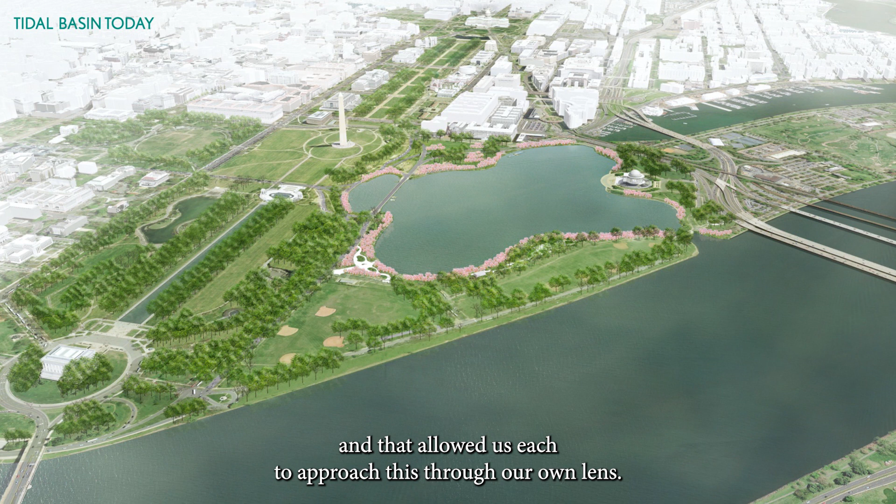What we recognized allowed us each to approach this through our own lens. We recognize that the reality is that this landscape is already experiencing the impacts of an evolving climate. Saltwater intrusion through the aging seawalls has already started to affect the cherry trees that are a critical part of our national identity and a symbol of our international relations. Given its proximity to the Potomac and the influence of the Chesapeake Bay, just like CL was talking about yesterday in Apalachicola, this site will be an early indicator of the impact of sea level rise and increased flooding frequency. By 2050, projections show that the tidal basin, the Jefferson Memorial, the FDR Memorial, and the Martin Luther King Memorial will all experience frequent flooding and severe impacts from sea level rise and saltwater intrusion.

We approach this through the lens of preservation. A lot of our work involves preservation, and when you first look at Section 106 of the National Historic Preservation Act, it sort of stumps you on how you address change at this scale. The federal requirements say that we have to seek ways to avoid, minimize, and mitigate any adverse effects. I think we all wish we knew how to do that.

So we took a different approach on this and accepted the fact that this will continue to change. We started with an understanding of the tidal basin as a landscape that is not singular, not fixed, nor should it be. It's as much about the people it represents, their actions and dreams, as the experiences it affords, both collectively and individually. And it reflects many moments in time and many memories throughout time. We posit that this landscape has actually never been complete, and that regardless of the impacts being felt by a changing climate, it ultimately must remain forever an open and flexible work in progress.

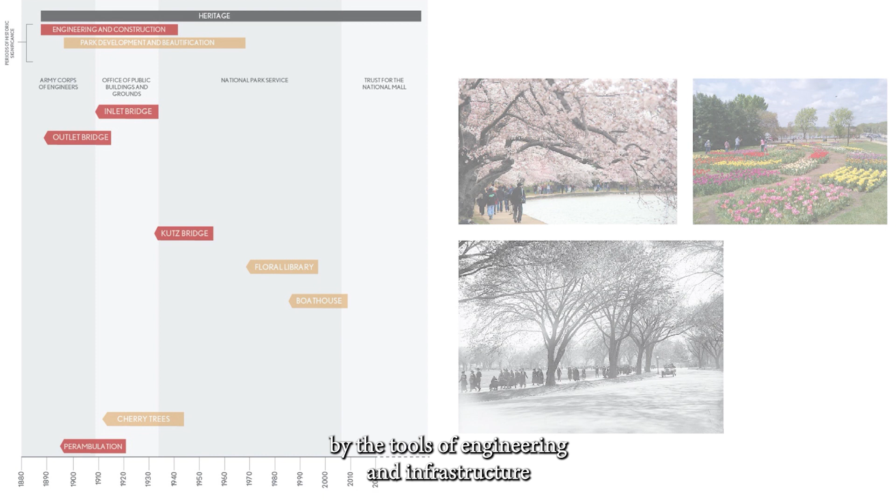The tidal basin has been shaped by the tools of engineering and infrastructure in the name of beautification and park building, and for collective commemoration and memorialization. Today, that heritage is at risk. We see preservation as a layered strategy that includes reinforcement where feasible and effective, which is not everywhere, and migration where not. Recognizing the need for this landscape to continue to adapt and evolve well beyond the scope of our knowledge today, balancing preservation with a vision for continued progress forward.

To facilitate this, we built the case that the tidal basin's landscape significance, unlike what's spelled out in the Secretary of the Interior's guidelines, which talk about things, elements, and features of a site, the tidal basin was not about those features. It was really, in many ways, about the qualities and experiences: your relationship to water, your relationship to the L'Enfant grid, your relationship to the cherry trees, and how you move through those spaces. The circulation network then becomes not a series of lines on the ground that are about paths, but a series of experiences held both individually by the single user and collectively as we all take those paths, either together or apart.

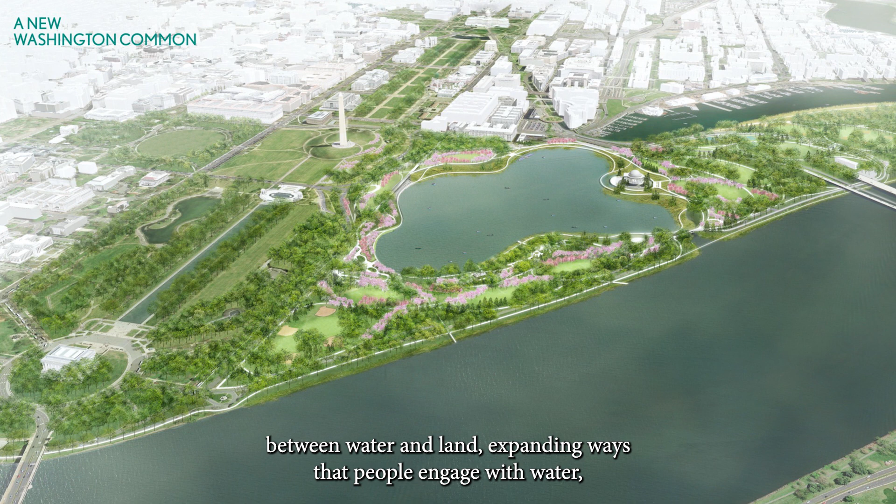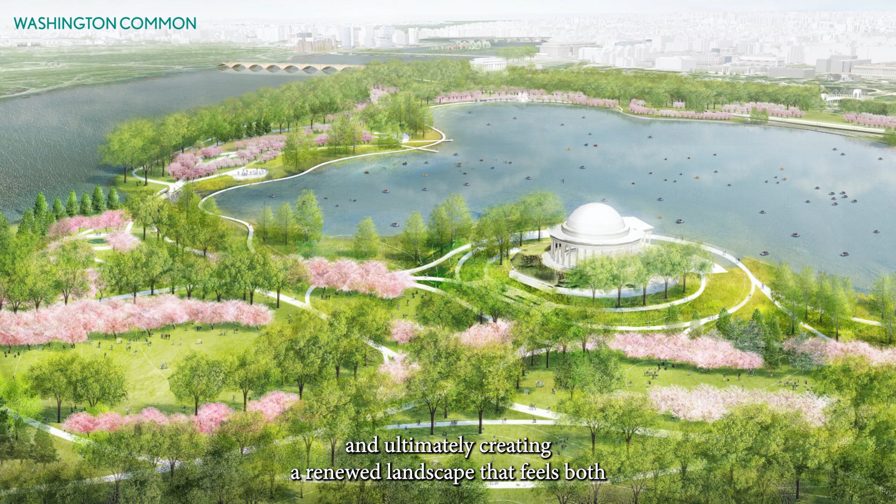So our question became: how do you maintain the qualities of this place while addressing the dynamic relationship between water and land, expanding ways that people engage with water, introducing prospects where these dynamics become visible, and ultimately creating a renewed landscape that feels both continuity with its past and asserts a new relationship with its future. Thank you.

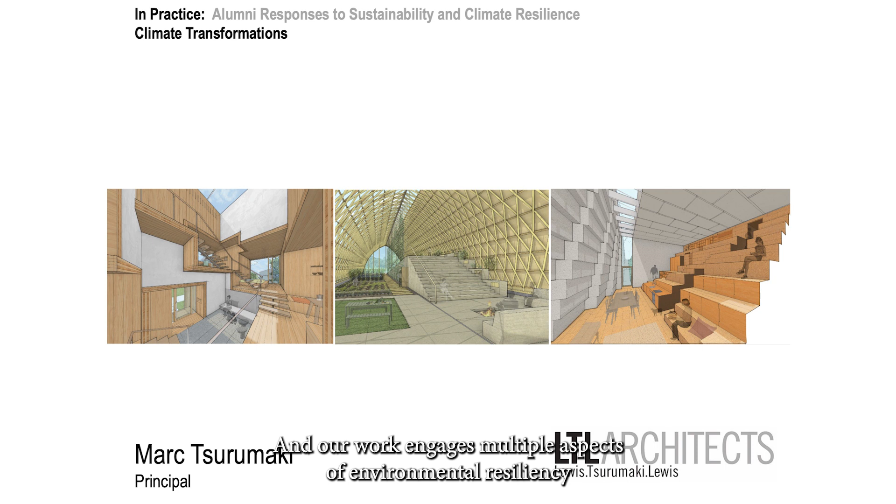Thanks so much, John. Amazing to see the work and really fantastic to be here and part of this panel and symposium today. My name is Marc Tsurumaki. I'm one of the principals of LTL Architects. We're located in New York City, and our work engages multiple aspects of environmental resiliency, from questions of sea level rise and its impacts on cities in a project for the Rising Currents program at the Museum of Modern Art back in 2010, to the restoration of Steeplechase Pier in Coney Island in the wake of Hurricane Sandy.

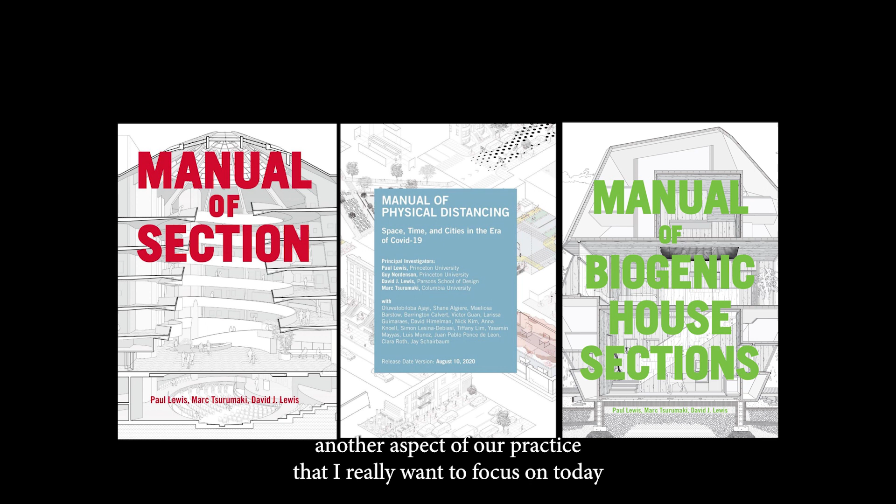But there's another aspect of our practice that I really want to focus on today that operates principally through research, publication, and representation, and this often takes the form of what we call manuals. Today I'm going to talk about the most recent of these publications, called the Manual of Biogenic House Sections,

which engages questions of how we build and specifically what we build with in a moment of environmental crisis. This involves a shift from thinking about operational carbon to thinking about embodied carbon. If we look at the next 30 years, we realize that half of the total carbon emissions of new construction around the planet will be embodied carbon, more if we think about the impacts of high-performance building. And the important part about that is that embodied carbon is upfront carbon.

Whereas operational carbon accrues over the lifespan of the building over decades, embodied carbon is already expended at the time that the building is built, which means that it's arguably the more relevant component to address if we're really looking at these urgent time spans that we need to avoid the most devastating impacts of climate change. So what can we do?

We can build less and reuse more, and reuse is an incredibly important part of this embodied carbon question, but it's very unlikely that we're going to reuse our way out of this problem. By 2060, the world's projected to add about 2.5 trillion square feet of new construction. That's essentially doubling the building stock of the planet in 3 decades, and much of that in the global south, where reuse has more limited possibilities.

So what are the alternatives? Well, one of the alternatives is to build as much as possible with biogenic and geogenic materials that are low carbon, or in the case of plants, actually sequester carbon within their very cell structure. The good news is that these materials are readily available. They're abundant, they're globally distributed, they usually require very minimal processing, they're inexpensive, and they're reintegratable into renewable cycles. And most importantly, they're available now.

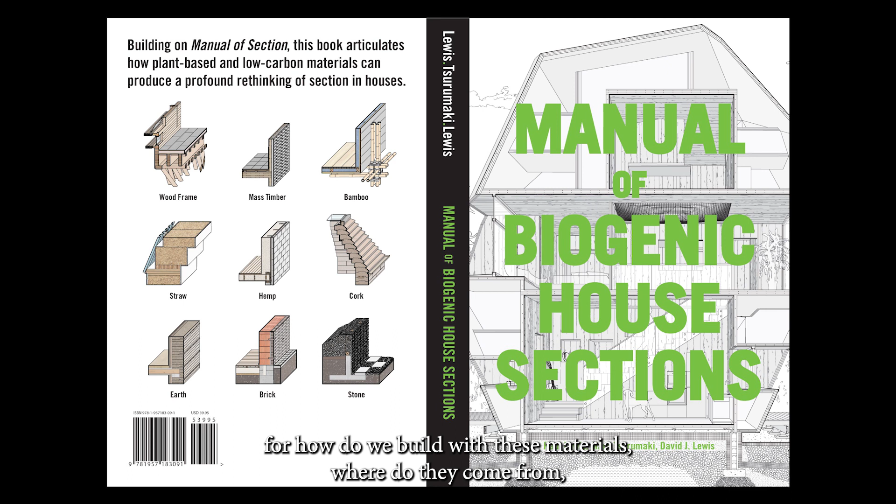So for the last 4 years, we've been working on this publication, which we hope acts as a guide and a manual for how do we build with these materials, where do they come from, how are they processed, and how have they taken the form of innovative buildings in the context of houses from around the world. So why houses? In part because we know houses are a big part of the problem.

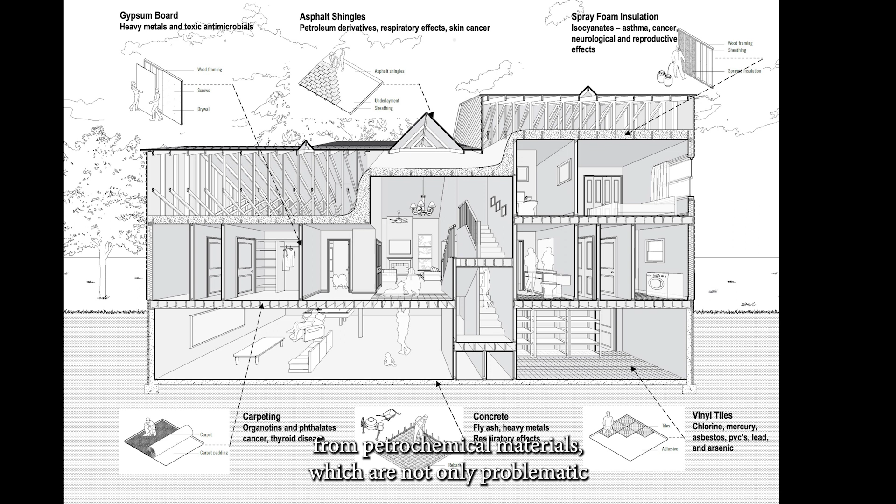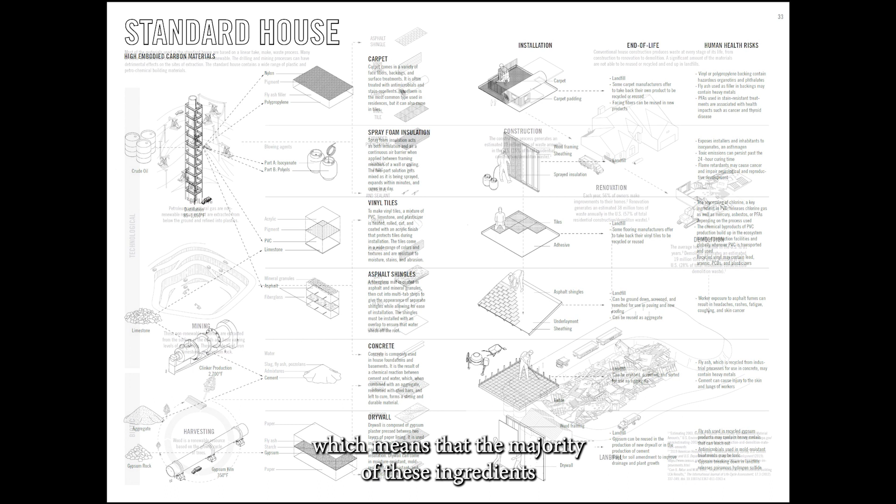We build too many of them, over 1 million single-family homes in North America alone every year. And so the very ubiquity of the house makes it a potent vehicle for transformations in our material economies. In North America, at least, our houses are too big, and with the exception of the wood frame, they're built almost entirely from petrochemical materials, which are not only problematic from a carbon standpoint, but also from a human health perspective. They're part of a take, make, trash linear cycle, which means that the majority of these ingredients or materials end up in the landfill at the end of the life cycle of the building.

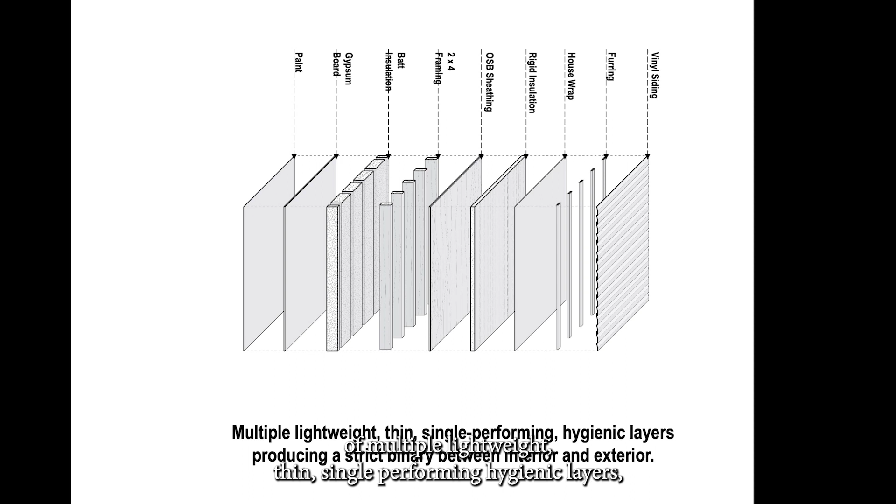If we zoom in on the wall of the house, we see one of the reasons for this, which is that the wall is comprised of multiple lightweight, thin, single-performing hygienic layers, which are based on a strict division between inside and outside. These layers are, again, largely synthetic. They're very difficult to pull apart and reprocess, and they're often working at cross purposes to one another.

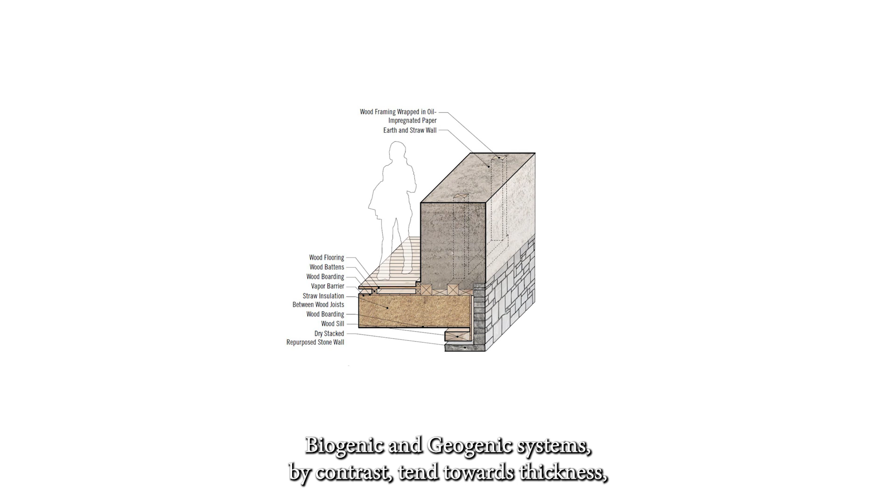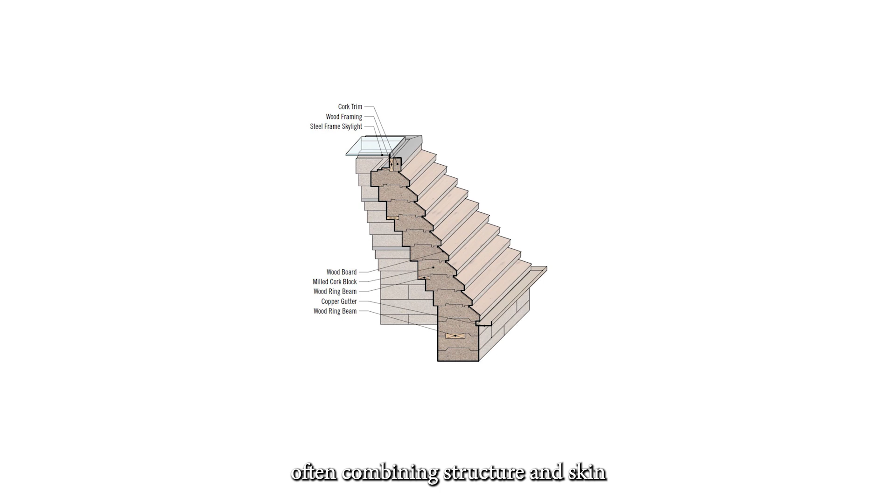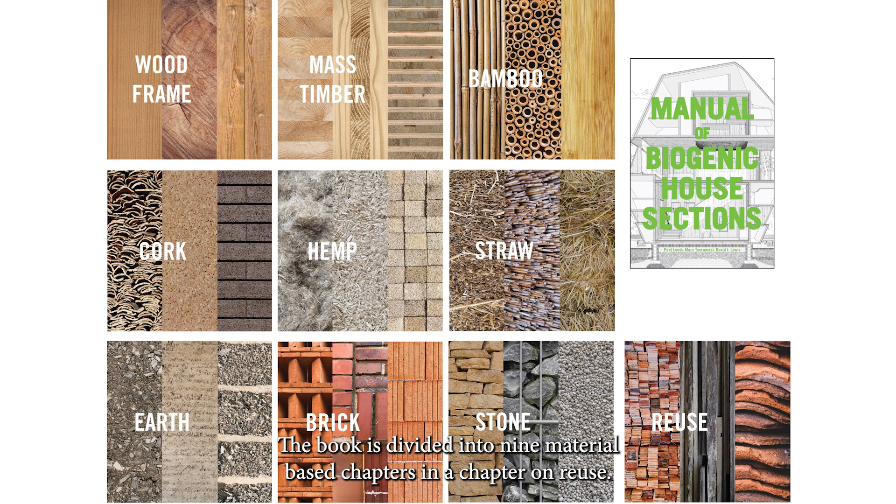Biogenic and geogenic systems, by contrast, tend towards thickness, often integrating multivalent performance within a single monolithic mass, often combining structure and skin, envelope and insulation within a single symbiotic assembly. We look in the book at 55 such assemblies culled from houses around the world. The book is divided into 9 material-based chapters, and a chapter on reuse.

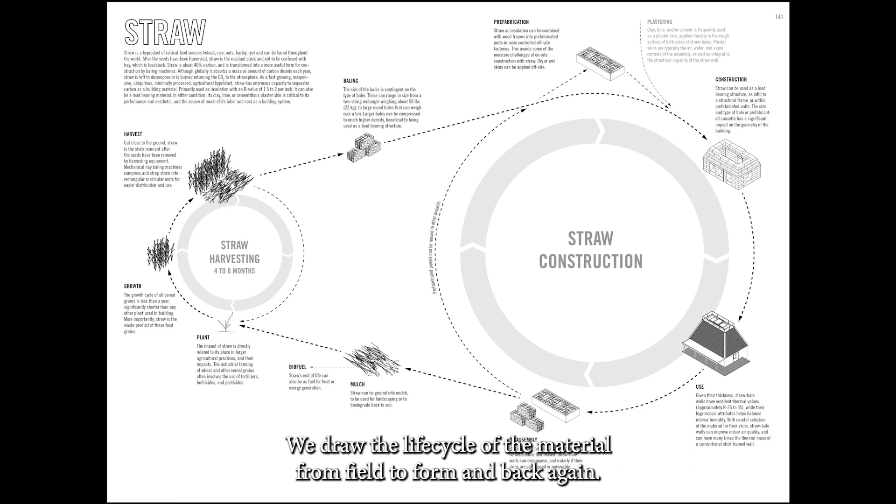In each instance, we look at the carbon sequestering potential of the material. We draw the life cycle of the material from field to form and back again, repositioning the building not as a static artifact, but as a temporary accumulation of matter that has an origin and an afterlife that's tied to recursive cycles that are bound to natural systems.

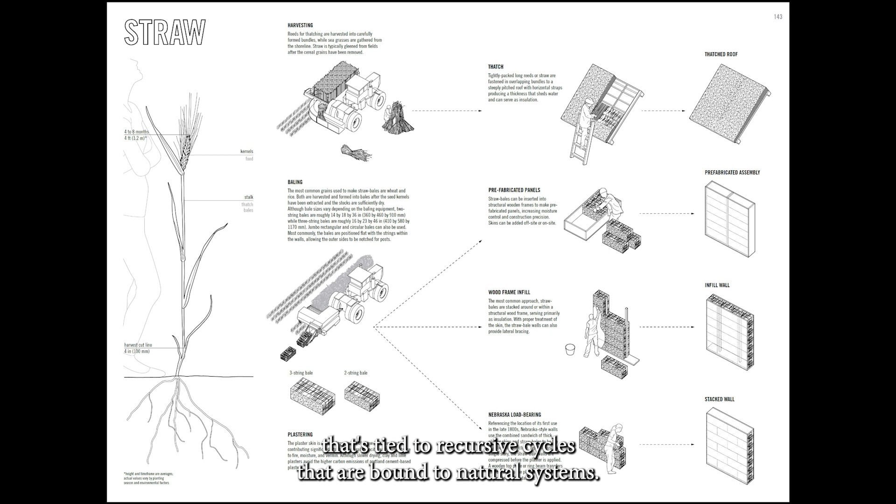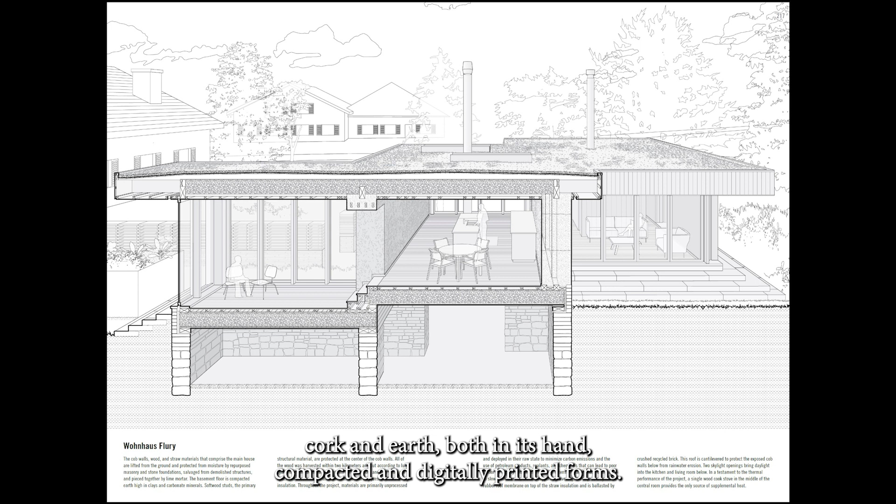We draw the material and its transformation into a building component, and then in each of the 55 houses, we create detailed axonometrics and sectional perspectives that show the relationship between the material assembly and the spatial form of the building. We do this for straw, mass timber, bamboo, cork, and earth, both in its hand-compacted and digitally printed forms. In each of these instances, we're really interested in the ways the encounter with the particular material drives the tectonic and spatial logics of the house.

After 4 years of this research, we're now folding this back into our own practice and engaging in a series of projects that look at the architectural implications of plant-based materials.

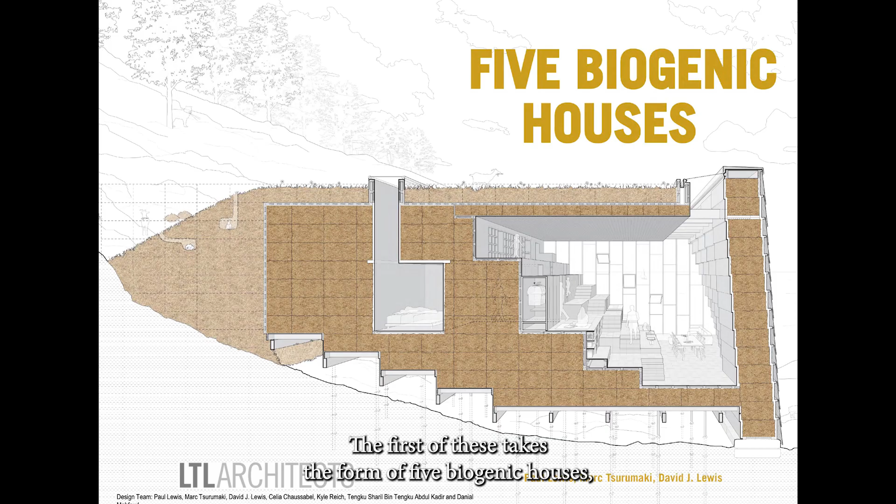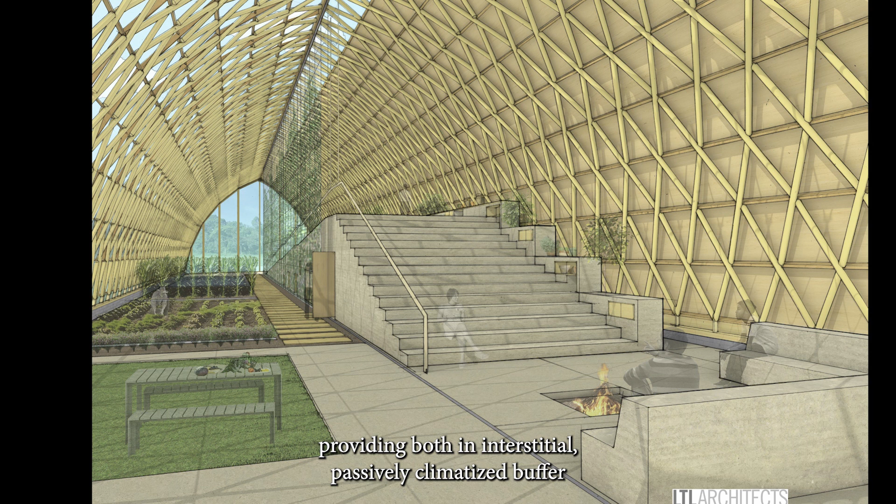The first of these takes the form of 5 biogenic houses: a CLT house based on minimally processed CLT blanks that creates a contemporary version of an A-frame cabin, and a bamboo lamella greenhouse enclosing an earthen dwelling, providing both an interstitial passively climatized buffer and a productive garden for the inhabitants.

And 2 houses based on straw as mass: a hollow cube of straw bales and CLT modules that reinforce each other, the modules forming the rooms of the house, connected in a spiral from front door to roof, creating a house that's both thick and porous.

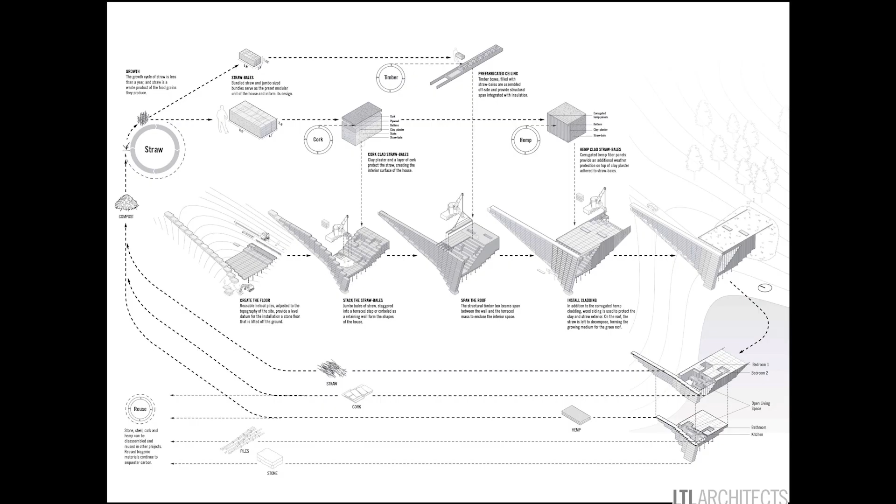And finally, a house based on 2 different methodologies of piling up jumbo straw bales: a corbelled wall and a terraced interior landscape. Here we're really interested in capturing the space of the house in between, in the very question of thickness and mass.

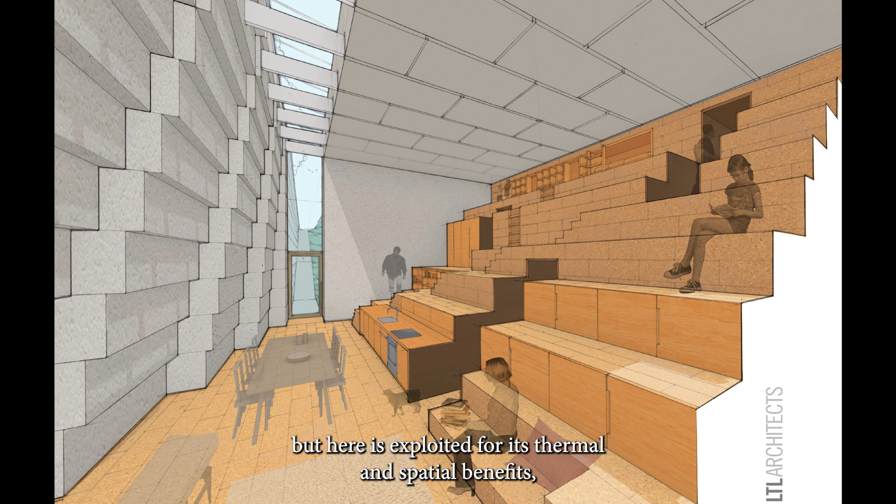Mass is often understood in negative terms of inefficiency, but here is exploited for its thermal and spatial benefits, underscoring the way an encounter with biogenic materials can not only allow us to reevaluate architectural commonplaces and invent new spatial possibilities, but also reconceive of our buildings as inseparable from the material and natural cycles that give them form.

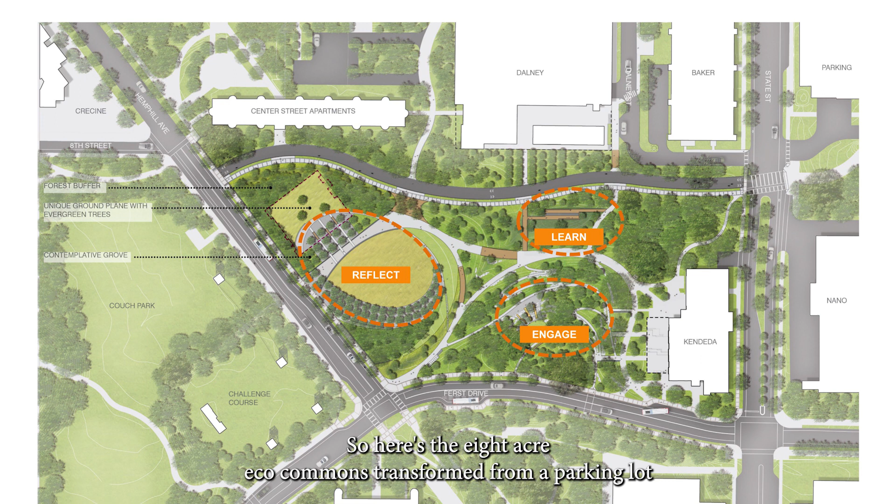All right, so here's the 8-acre eco-commons transformed from a parking lot into a thriving Piedmont woodland landscape, and the new open space supporting sustainability initiatives from biodiversity to stormwater management and opportunities for education and social growth. Let's see, here we go.

All right, this is the diagram that illustrates ecological performance value, transitioning from a parking lot into an urban forest, providing carbon sequestration, air filtration, and runoff mitigation, and accommodating more than 500,000 gallons of stormwater.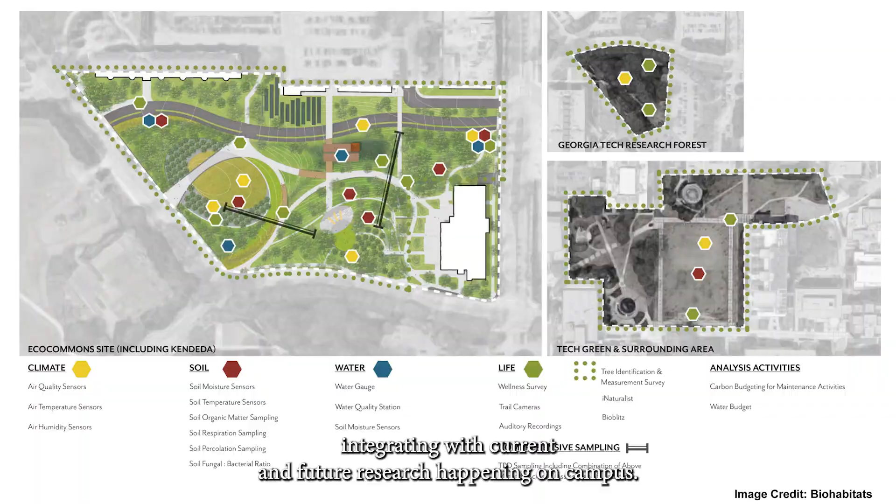With over 20 on-site monitoring devices integrated into the landscape, Georgia Tech students and faculty were involved in planning for real-time data collection, integrating with current and future research happening on campus. Native plantings create varied and immersive site experience for students, with places for outdoor education and experimentation. And as evidence of successful pollinator habitat, the bee boxes were actually a recent addition by students.

Through research, we learned that the site was formerly the location of the Pickrick Diner, an all-white establishment that refused service to 3 black students from a local seminary, an incident that led to the first lawsuit upheld by the 1964 Civil Rights Act. Unity Plaza celebrates the bravery of George Willis Jr., Albert Lee Dunn, and Woodrow T. Lewis, the 3 students who bravely pushed forward into uncomfortable spaces to lead social change, and offers a space for continued dialogue, acknowledging that you can't have environmental justice without addressing social justice.

Memorial Park, a 1,400-acre landscape, is one of the largest urban parks in the United States and Houston's largest wilderness area.

NBW's 2015 framework plan focuses on restoring ecological systems, creating greater resiliency while reconnecting the park's land, waterways, and people, and was informed by more than 3,000 Houstonians who contributed to its development.

The park suffered from vast tree canopy loss after hurricanes and drought, in addition to access challenges for both people and wildlife. The park was also bisected in 1955 by the construction of the 6-lane Memorial Drive, disrupting habitat and migration for dozens of species.

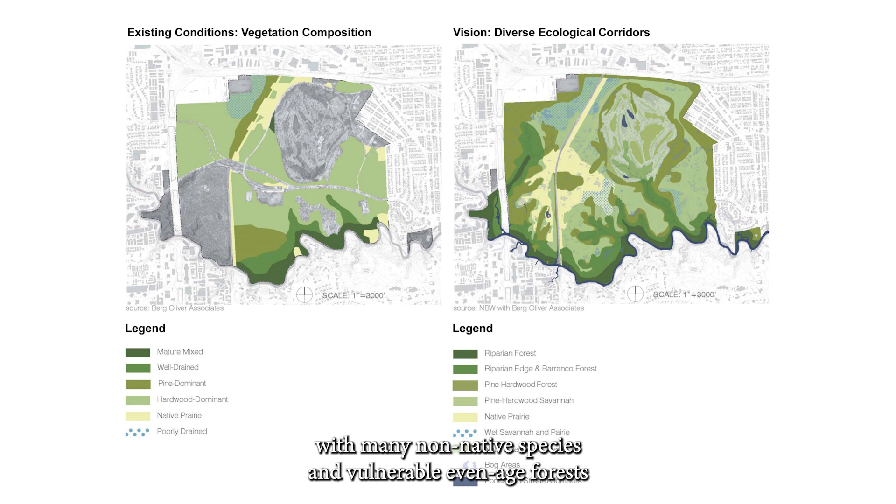Over time, site ecology had become homogenized, with many non-native species and vulnerable even-age forests lacking resilience to withstand increasing climate event pressures. The NBW plan resurrected historic prairies and proposed diverse ecological corridors to improve connectivity for animals, stormwater, and people.

The first of several major implementation projects completed since 2015, the Eastern Glades introduces a formal entrance to the park, reclaims 100 acres of previously inaccessible land at the park's edge, and creates a new lake with miles of trails offering immersive experiences of the surrounding ecology.

The 5.5-acre Hines Lake not only provides habitat and a focal point of experience at this new moment of arrival, but acts as a reservoir for site irrigation, offsetting what was previously drawn from municipal water, with terraces and pathways surrounding the lake providing opportunities for nature watching, recreation, and reflection along the water's edge.

Another major implementation project recently opened to the public, the Land Bridge and Prairie reconnects the divided park 67 years after the construction of the highway that bisected it.

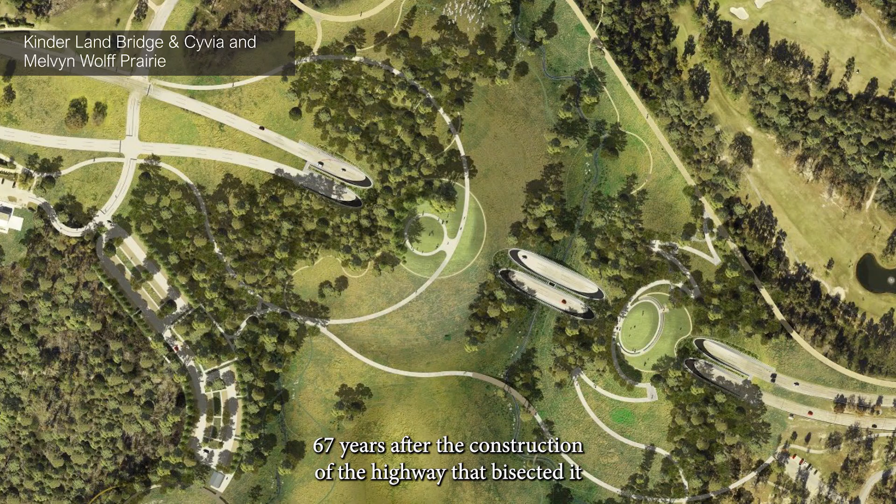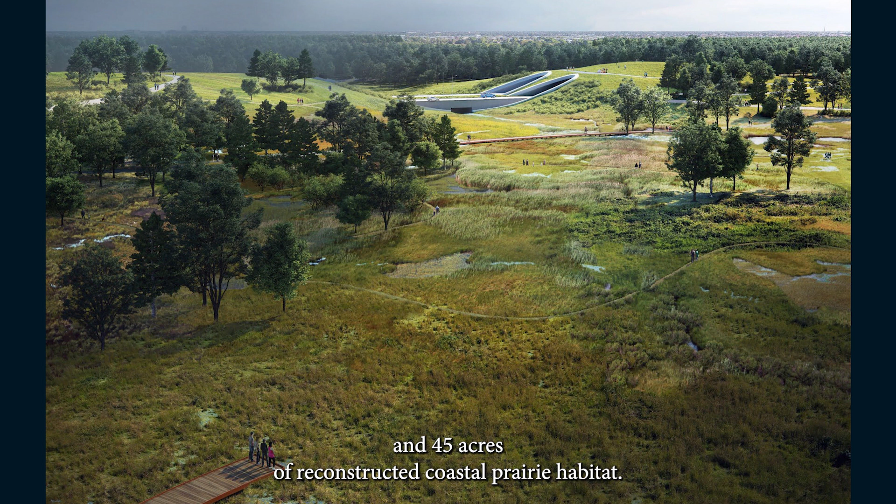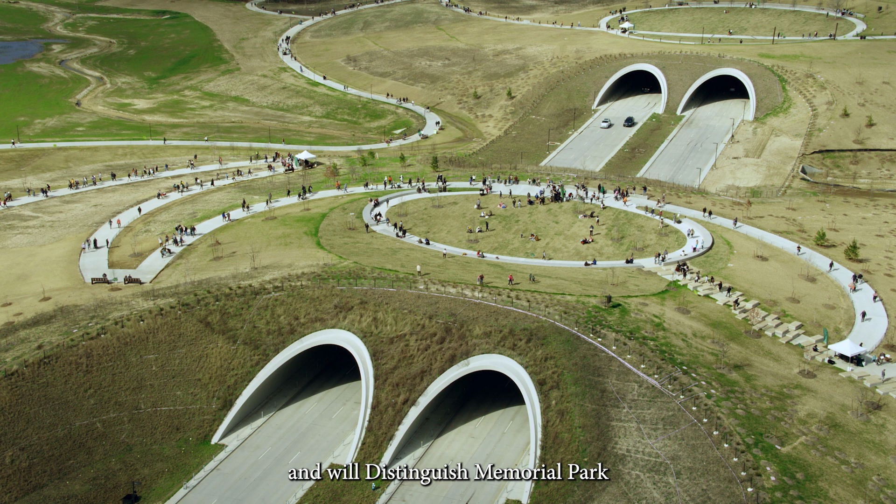With over 500,000 cubic yards of soils harvested from on-site to cover the tunnels and create the mounds of the land bridge, and 45 acres of reconstructed coastal prairie habitat, the project serves as a triumph of green over gray infrastructure and will distinguish Memorial Park and Houston as an icon for a more resilient future.

Lastly, Circle Bar Ranch is a conservation agriculture and camp framework plan recently completed that exemplifies the NBW process of deep cultural and ecological research leading to design.

A 2,800-acre former Angus cattle ranch and exotic game operation with much of its land in loblolly monoculture, we were asked to consider a camp and the best use of the land, but given the scale of the property, we looked to do something more impactful that could offer value to the larger region.

Through research, 4 key narratives emerged that became inspirational for major land management and program initiatives: the history of the longleaf pine ecosystem, indigenously managed by fire and one of the most biodiverse ecotypes in the world, decimated across the Southeast by destructive clearing practices at the turn of the century. This had given way to the present-day loblolly pine monoculture, agroforestry that dominates the region with low economic returns.

Connected to this, we learned about the piney woods cattle, a 500-year-old breed evolved to graze the longleaf pine savanna understories, that had been replaced by big beef European cattle, with a small contingent of local farmers working to restore the breed for meat and forest management.

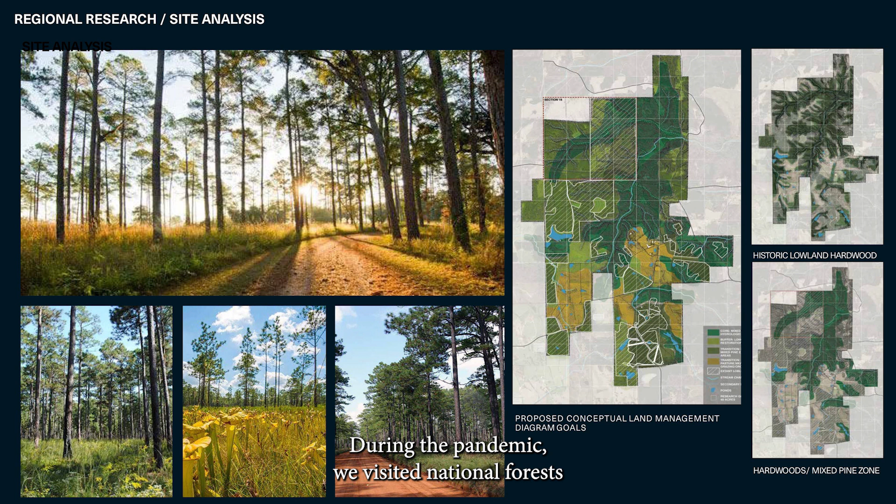During the pandemic, we visited national forests where healthy longleaf pine ecosystems were being managed and conducted a forestry workshop to learn how our site could be used as a demonstration of restoration and landscape evolution from loblolly back to longleaf pine. We carefully studied our site soils and uncovered traces of historic longleaf plantations on the property, as evidenced by mapped logging rail lines once used to extract huge timbers across the region.

As steps toward becoming a learning landscape, we were able to plant demonstration blocks of longleaf pine seedlings, save 30 head of a heritage breed of piney woods cattle, and bring them to the site for exploration of both meat production and grazing for land management.

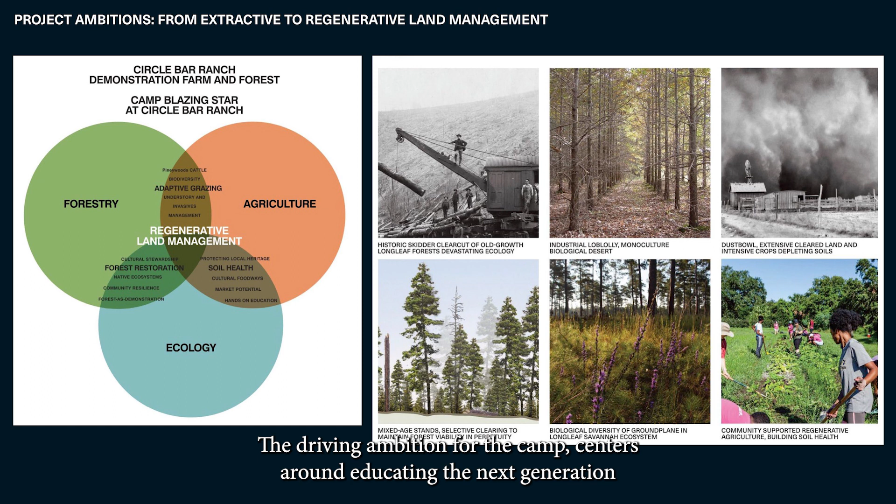The driving ambition for the camp centers around educating the next generation of land stewards, demonstrating integrated regenerative management practices in agroforestry, agriculture, and ecological restoration, moving from extractive practices that have decimated forests and farmland towards carbon sequestering, diversified forests, and healthy soils.

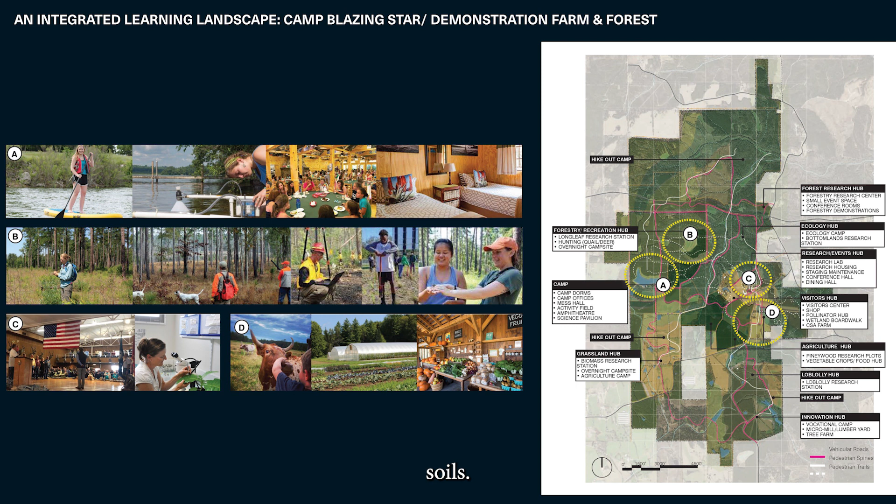The camp is intended to be a base not only for kids, but for on-site research, educational gatherings, and conservation demonstrations toward a broader community impact, with site hubs for respective programs and trail networks and circulations providing key moments of engagement.

As a living model of regenerative management, the camp facilities are immersed in the forest, integrating ecological education and pilot forest conversions into everyday experience for campers.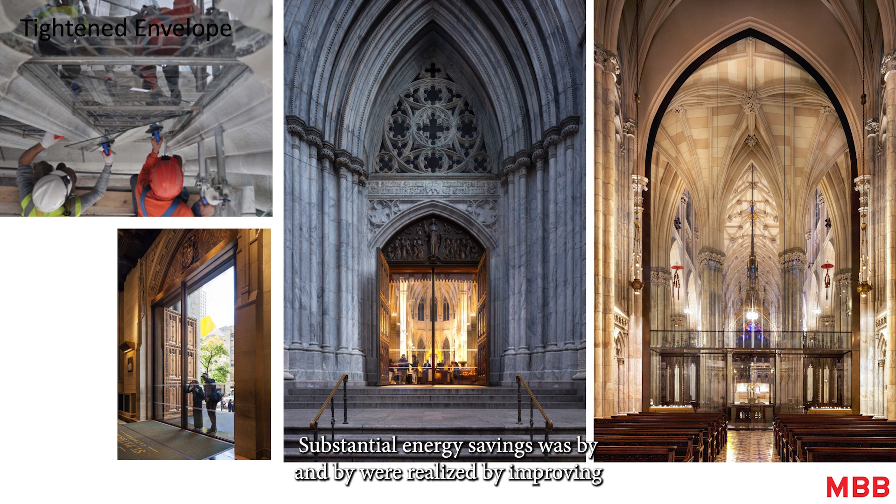Substantial energy savings were realized by improving the building envelope at doors and windows, including high performance glazing at the stained glass in the upper left, and contemporary bronze and glass door enclosures that retained heat and air conditioning.

We focused on elevating the human experience by making the cathedral more inclusive, doubling the occupancy count, and making the building fully accessible. Indoor air quality was increased significantly, and outdoor noise levels were reduced by 75%.

We were able to reduce the visual clutter that had accumulated in the building over 150 years, and that helped us enhance the architecture.

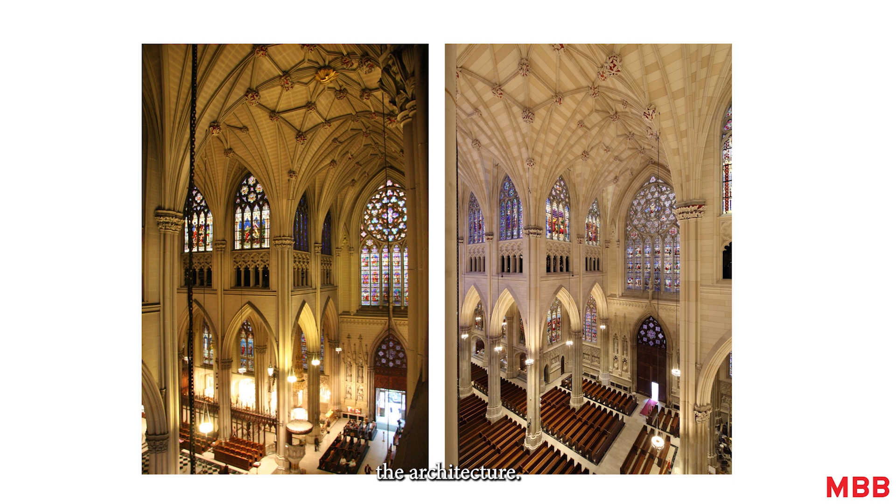This is an image after the completion of the second phase of the project, which happened to coincide with a visit by Pope Francis, who gave a mass at St. Patrick's Cathedral. It highlights the power of architecture to bring people together, but also speaks to the importance of treating existing buildings as if they will be around for decades, if not centuries.

And we also need to provide the sticks and carrots to regular buildings to make sure that people decarbonize the existing buildings that are out there.

Boston architect Jean Carroon notes that there are over 350 billion square feet of existing building space in the United States. That space may be our most significant renewable resource. Thank you.

Good afternoon, everyone. I am DJ Gerken, the Executive Director of the Southern Environmental Law Center, and I'll start by disclosing that I have two significant problems this afternoon. The first is I used to be a real lawyer, but now I'm an administrator.

That means I'm going to talk about the work of 115 legal and policy experts, which is really way above my pay grade. I'm just hanging on by my fingernails most of the day.

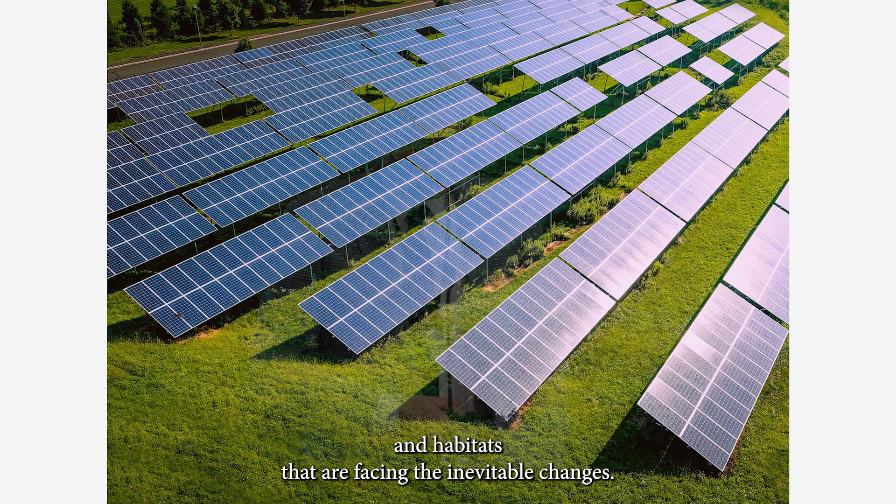So that's our broad spectrum climate strategy. But we are also focused on protecting communities and habitats that are facing the inevitable changes ahead with climate change.

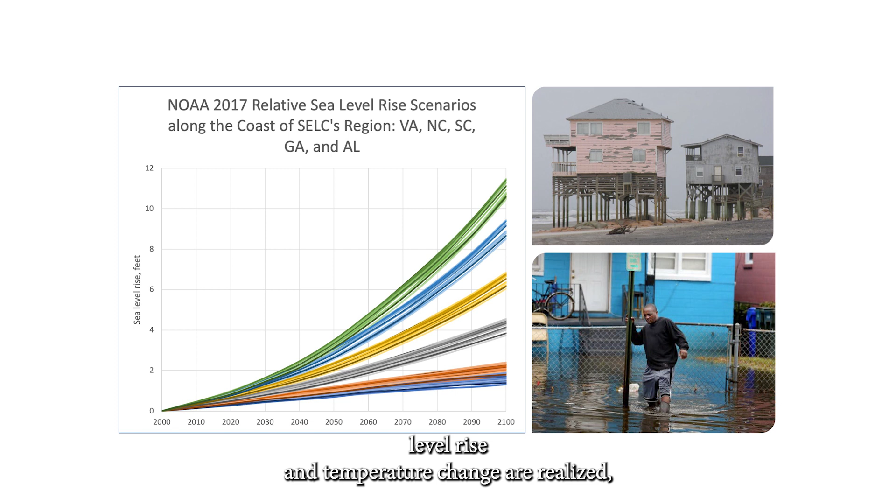If the worst projections of sea level rise and temperature change are realized, the South is going to experience one of the largest human migrations in our nation's history. That's a significant threat. Some amount of this is going to happen no matter what, and so at SELC we are working to keep highways and homes out of the path of those rising seas and stormwater.

We are making sure that our infrastructure, our communities, and our laws are ready for the bigger and more impactful storms that are headed our way. And that's what we do every day.

So back to the topic of the panel. What might not be obvious is how much the design professions interact with what we do.

There's a lot of ways to think about what lawyers and environmental advocates are up to. I like to think, and what I tell my colleagues, is that we uncover the truth and we use it to tell powerful stories that persuade people to do the right thing at its most basic level.

Well, knowing what the truth is and knowing what the right thing is, that's these folks over here, right? It's the design profession, scientists and engineers, which means that in my profession, I get to impersonate highway engineers, architects, urban planners, scientists, and engineers, much to the chagrin of highway engineers, architects, and urban planners over the course of my career.

In one particularly entertaining excursion, I got to negotiate with landscape architects designing Tiger Woods' first North American golf course, complete redesign. I've never played the game, but how hard could it be, right?

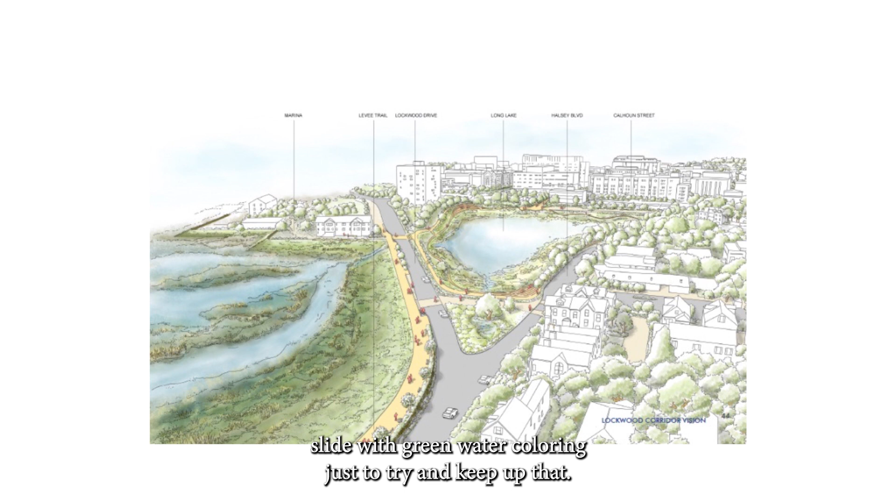And here's the point I want to make about this: this design costs less, it is more effective, and it is more beautiful. It is just better. And if you ask folks in the design profession, that's the path forward, right? It is using our creative engine as a human society to come up with solutions across the spectrum of our economy that are more effective, cheaper, just more beautiful and better, so that people want to embrace them. We don't have to force them to with regulations—they perpetuate under their own momentum.

That's what happened with solar energy, right? 15 years ago, folks in my field were pushing solar energy uphill, and now it is going downhill under its own momentum because it is the cheapest source of energy anywhere. That's where we want to get.

But here's the thing, that's going to take a little while, right? We've been working on this for a long time. We're making enormous progress. In the meantime, my colleagues and I will be in the trenches trying to protect the things we have, trying to make the world a little bit less bad than it might otherwise have been. And so to the School of Architecture and to my friends in the design profession, I am really deeply grateful for all the work that you're all doing.

I look forward to living in the world you're trying to build. And in the meantime, we're going to try and level the playing field for the solutions you're making by forcing bad actors to internalize the costs they are imposing on the rest of us, and telling powerful stories that get us all ready to embrace these great solutions.